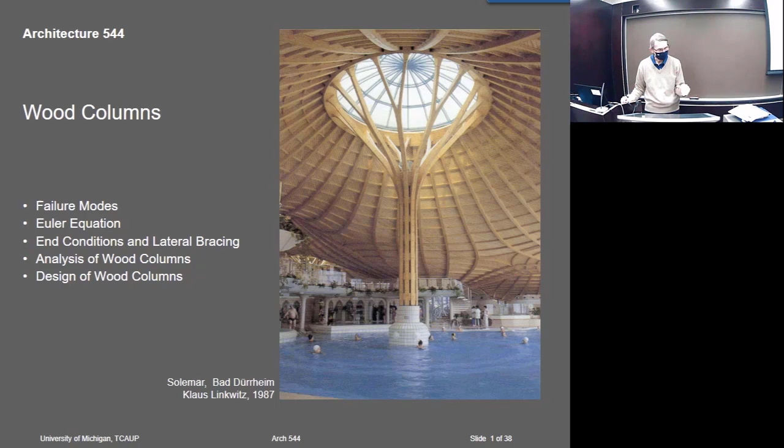So this is a pretty popular resort, but a beautiful structure that Linkwitz did all the engineering for. I think I have a whole separate lecture on that, the erection of it and whatnot, but worth the image, I guess.

Okay, so in terms of designing, or in terms of any structure, we look at three different things, right? Strength, stability, and serviceability. And in terms of strength, when we were looking at...

Oh hey, I could get my little, should I use a pen or a laser pointer? Oh I see, then I can't write on it though.

Okay, in terms of flexure that we looked at earlier, we're talking about MC over I, VQ over IB. Those are the simple strength calculations.

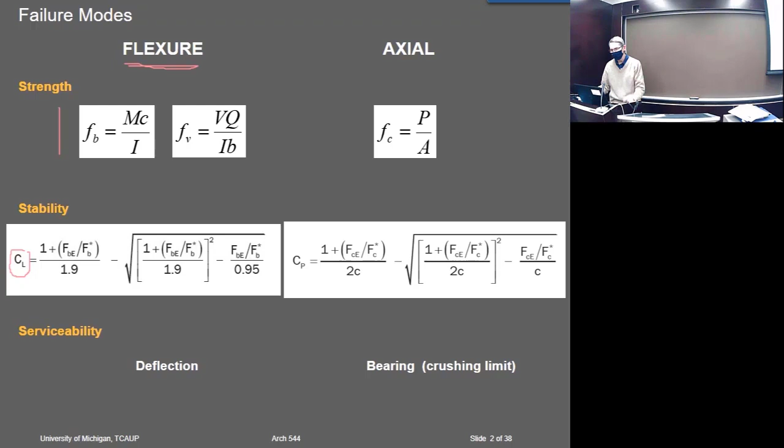Stability was handled by the stability factor, CL. That had to do with lateral torsional buckling in flexure. So that's where all the stability is wrapped up.

Serviceability with beams is mostly deflection, that's what we look at. I guess maybe bearing, although, no not really, well only in terms of how much it deflects I guess, has more to do with the crushing. So that would be more back up with strength.

In axial members, the strength is simply P over A. If you're not considering the buckling aspect of it, then the only criteria is the crushing of the material in axial load. So that axial compression would just simply be P over A.

Again, the stability is handled with this stability factor, or the buckling factor. For columns, it's CP, and you can see it's very similar to the buckling factor used with the beams. There's a slight difference. This element, C, that comes in distinguishes between dimension lumber or glue laminated, or I think there's a third choice. There's different wood types.

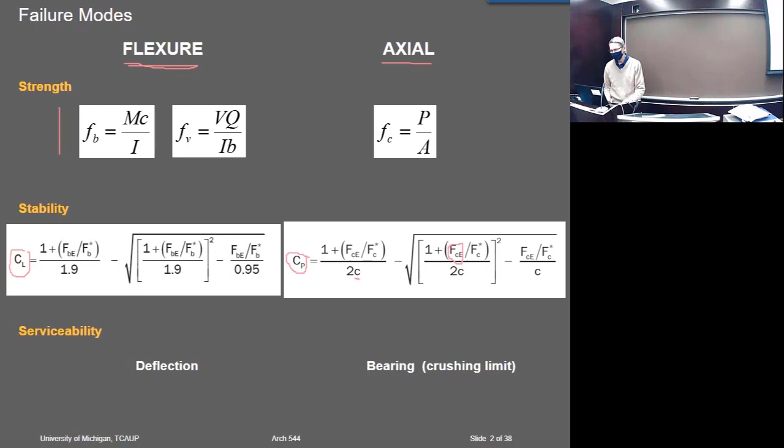Right, and then in stability, in serviceability, I put down their bearing, but only to the extent that the column changes height, that the bearing crushes or something that would become a height issue. There aren't too many serviceability issues I could think of with axial loads, actually.

Okay, so the fellow who first did the calculations—there's a famous story that he did it on the back of an envelope. There were engineers trying to come up with a formula for predicting the buckling of a column, because up to that time they had always just tested individual members until they buckled. There were tables available for individual members, like if you had a 2x4, but you'd have to have a table for every different type of wood, and a table for every different height, and test all of these individually. So they thought certainly there is an equation that would describe this phenomenon without testing each one every time.

So I think they were Dutch, and they sent a letter to Euler, who was at that time, I think, in Berlin. He had been studying elastic deformation, elastic curves, and that's why they wrote him, because that's what it is—an elastic buckling curve. He did the derivation and the calculation, came up with the formula, and sent it back like a day later, literally written on the back of their letter. The only thing he didn't exactly include was, I think, the K factor, and he mentioned it in his letter. He said, well, there's certainly a condition, some factor that's dependent on the fixity or whatever, but you can figure that out from testing.

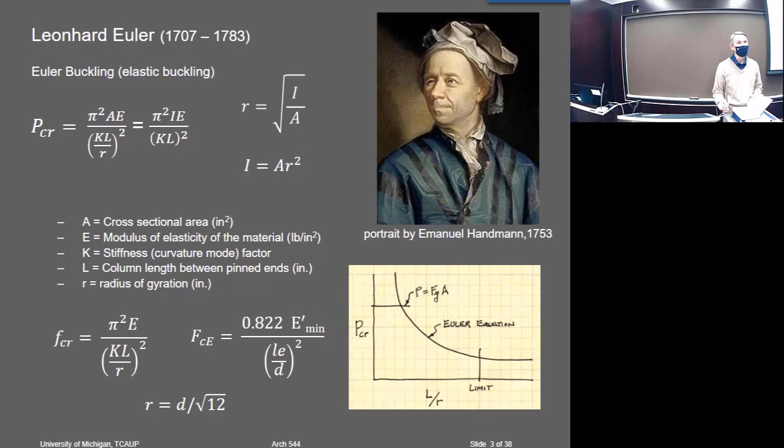Oh my goodness, so he was quite the character. Yeah. All right, well, now I've used up too much time. We'll have to pick up there.

Okay, and now back to columns. We had been talking about Euler and Euler's wonderful equation here. Oops, let's see. Do I not have my pen turned on?

This is the way we usually see Euler's equation, and this is actually the equation we use in wood. It is exactly the same, it looks a little different, but they've converted the R here to D here, and then the square root of 12, well, it gets squared, so it comes up here. This would be pi squared. Oh, I think it's divided by here. It's in the D, it's divided, and it's in the numerator, so I think it ends up being divided by 12.

Does that seem about right? Yeah, it would be something like 9 divided by 12, sounds like about 0.8. But anyway, so the equation is the pure Euler equation, even though it looks a little bit different. But they use D here for the slenderness ratio because it's a lot more convenient with wood, being a rectangular section.

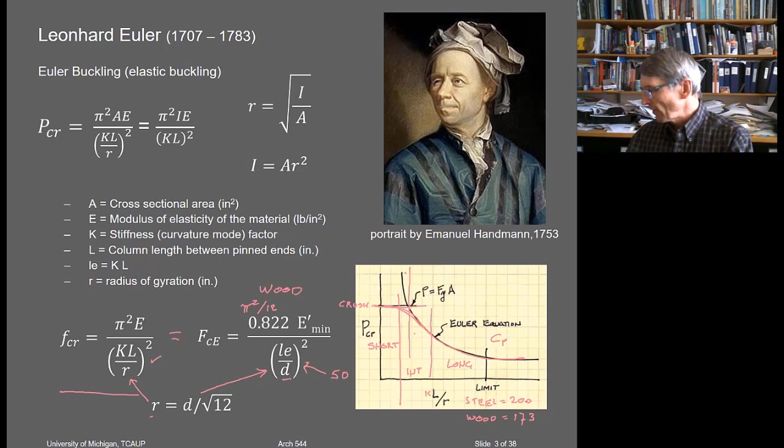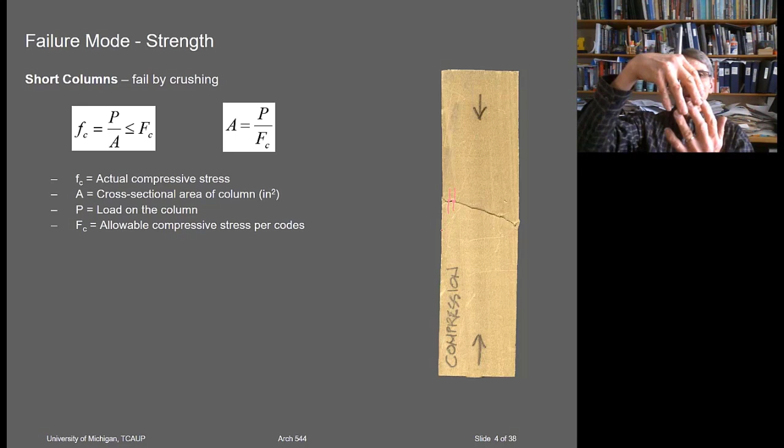If there were no buckling, then the wood would crush, and you can see it actually does. These fibers are kind of buckling, right? You've got fibers that are like little columns themselves, and the fibers are crushing or buckling in the wood, and that produces the crushing.

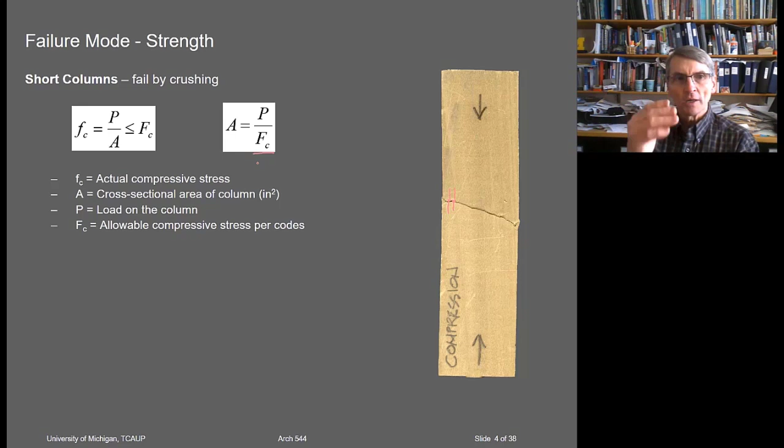This would be at the full allowable stress for compression. That's what you'd expect to see, and the area would be P over the stress, the load over the stress, or the stress is equal to the load over the area. But that would be a short column failure.

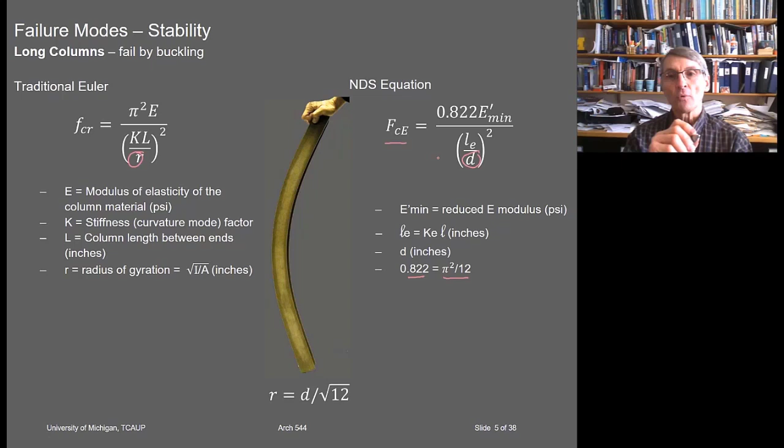Okay, but most columns are in between somewhere. They're not so short that they're going to crush, and they're not so long that it's a pure Euler buckling. They're in between, and that's why we use the CP equation to find exactly where on that curve they occur.

Of course, what really affects the behavior is the slenderness. The more slender it is, the more likely it is to buckle. And the slenderness, in the way we're defining it with the wood, is LE over D.

You can see, because wood is rectangular, you have a strong and weak axis, right? You'll have buckling about the x-axis. If this is the x-axis, then it's buckling about that axis, and that would be the strong axis. It has D greater, and your slenderness then would be less. As D gets smaller, your slenderness goes up.

So when D's 1.5 on a 2x4, that would be buckling about the weak axis - that would be about this axis. It would be buckling this way, and that would be the weak direction. So here you can see this would be the weak direction. That's the way it would normally buckle.

Of course, if you brace that weak direction, then maybe it will buckle in the strong axis. It'll buckle in the direction whichever of these slenderness ratios is greater. So here, for an unbraced 8-foot piece, we've got in the strong axis of a 2x4 a slenderness of 27, and in the weak axis it's 64, which shows you, wow, okay, that's already greater than the limit of 50.

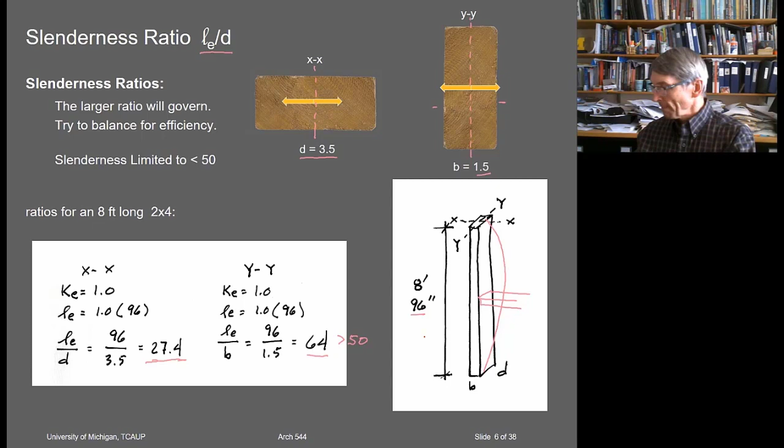Along with the height, the end fixity of the column affects the way it buckles, right? If both ends are pinned, which would be the normal condition, then you'll get the full length of it buckling. If one end were fixed and the other end pinned, then you're going to get only that part of it really representing the curve.

That would be at a ratio of 70% of the original height. That would be 70, and this would be 30 down here, right? And then that becomes the factor, the K factor.

Although that's the recommended value, they assume this isn't fully fixed, that it may twist a little bit and reduce it. If you've worked with steel, in the steel manual they get more precise with this—they look at the stiffness of the beams top and bottom, and they have a nomograph where you can plot across and find a more accurate K factor.

In wood, in truth, that doesn't happen, because the connection between the beams and the columns is really not fixed. It's going to be more of a pinned connection, so at most you might use this graph, but usually you'll be using this one right here. This would be the normal condition.

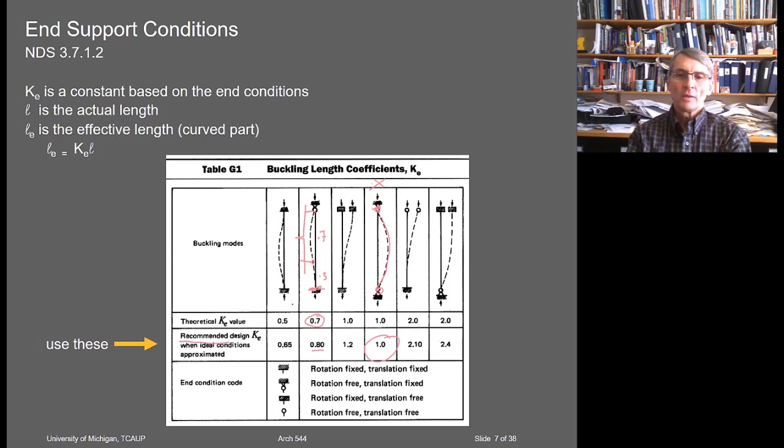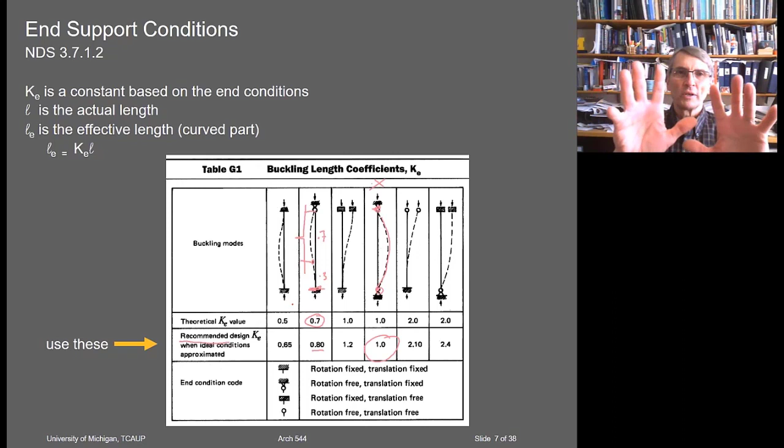If you have one end sunken into a concrete footing, like they typically do with outdoor decks and things, embedding that in concrete—well, maybe that would give you something like that, if the concrete doesn't twist in the dirt. So you could use perhaps 0.8, but normally you don't get fixity with it. Even with a steel bracket around it, the wood can shrink and become loose in that steel pocket. Maybe with steel plates bolted to the wood, but it gets to be a very complicated thing. And even if it's a steel plate that's bolted, the bolt presses against the wood and has some wiggle room, so it's very difficult to really get fixity with wood.

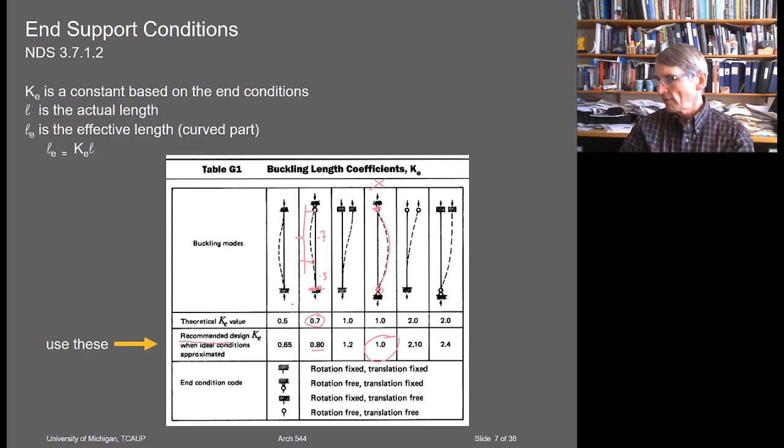This is out of the supplement, happens to be for eastern hemlock balsam fir, and the compression we're talking about is this one right here, parallel to the grain. This is for columns. Compression perpendicular to the grain is actually bearing—it's not on a column, because this is the direction parallel to the grain, which is how a column is normally oriented. This would be perpendicular to the grain.

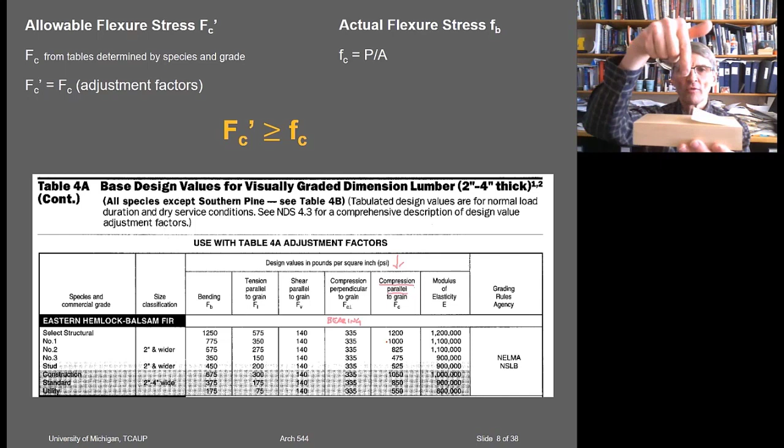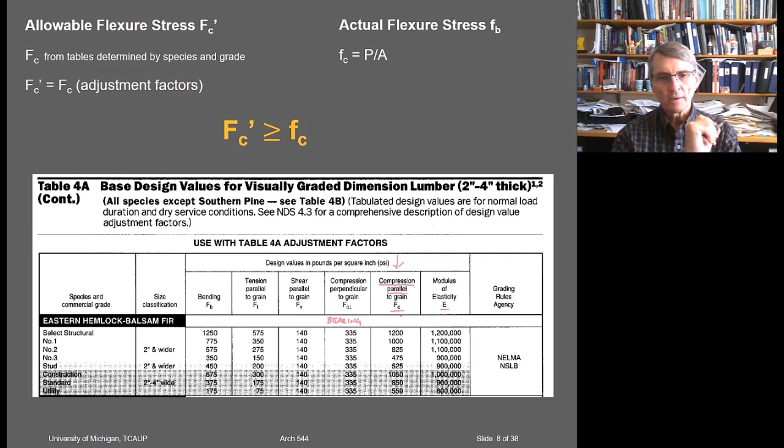The grain's going this way, so if I put a force on this way, it would be perpendicular to the grain. So if I have a sill plate—we'll look at this a bit later—in a stud wall, the stud would bear on the sill plate, and that would be the bearing stress, FC perpendicular. But the one we're interested in is this one right here, FC. You'll also need the E modulus, or E min actually, to calculate the CP factor.

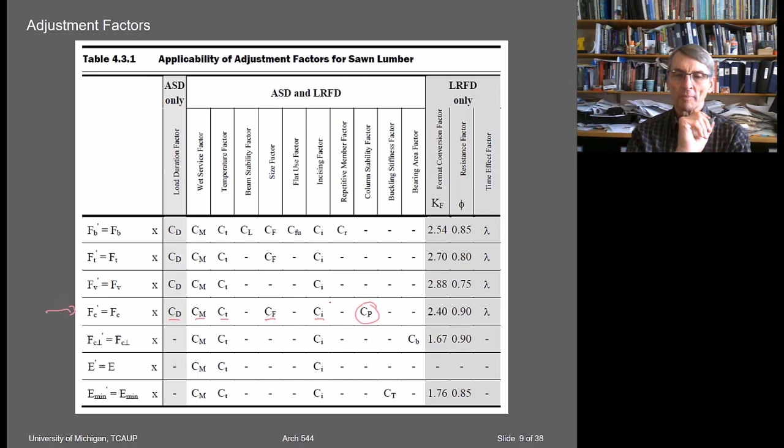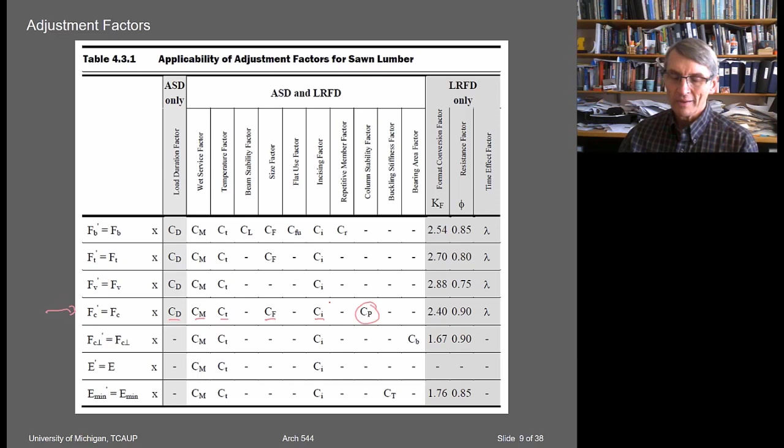You're always going to have to calculate CP unless it's totally braced, embedded in a wall or between two walls. So this just reviews some of these factors: CD, right, we've talked about that—those are all the CD factors and the different load combinations.

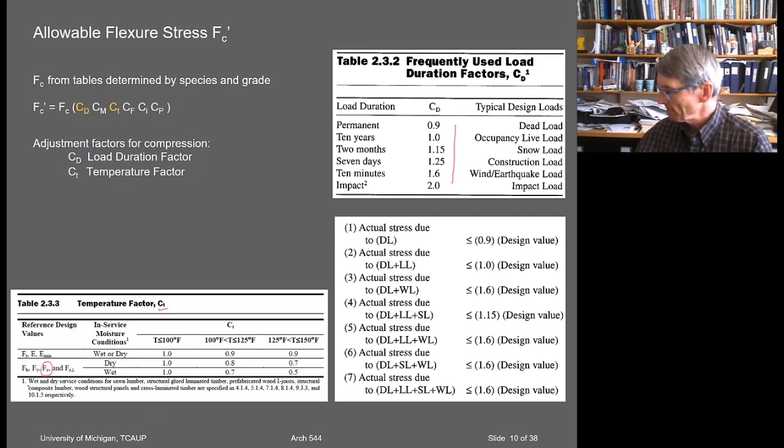Temperature factor—so here we've got the FC down there, depending on whether it's wet or dry, it's the same factor as for bending for temperature. Here for moisture content, CM, we're over at this end, and again you'd need both of these. If moisture is a problem, if it's above 19%, then you'll need the factor for E min to calculate the buckling coefficient, the CP, and then this would be the straight CM factor on the compression.

And there's a little double asterisk here: if it's really low-grade wood, less than 750 psi in compression, then you don't need to worry about the moisture further—apparently 1.0 can be taken.

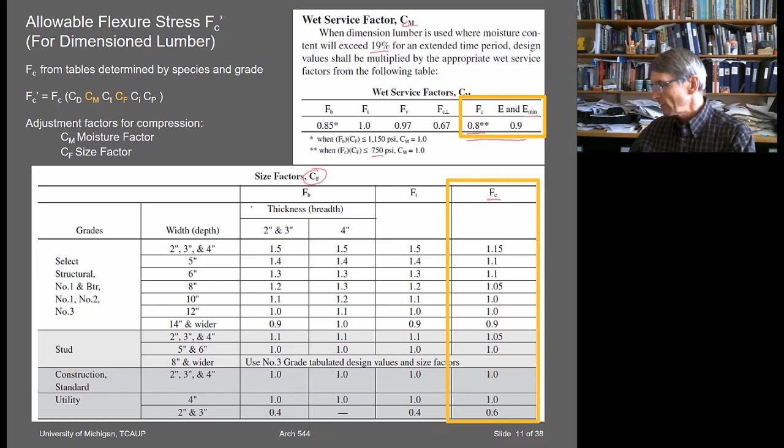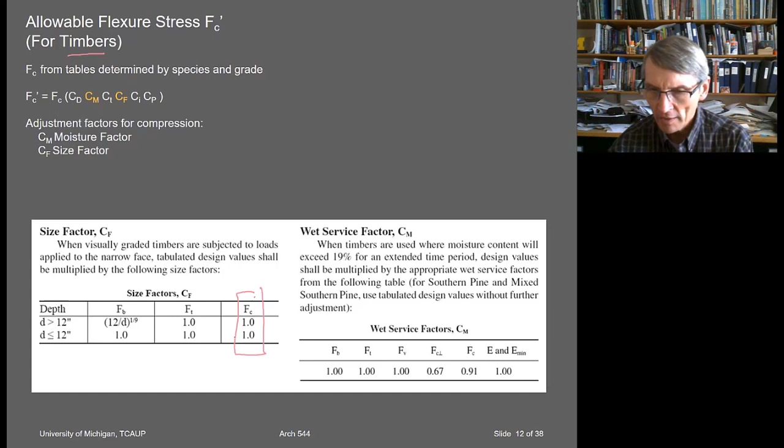And then these are all the factors for CF. Okay, and this is for the timbers—it's a little different for timbers, particularly CF, as I mentioned, is 1.0 for compression for timbers, so you don't need to worry about CF really for timbers. The moisture content is also a little different—those numbers are 1.0 for the E modulus.

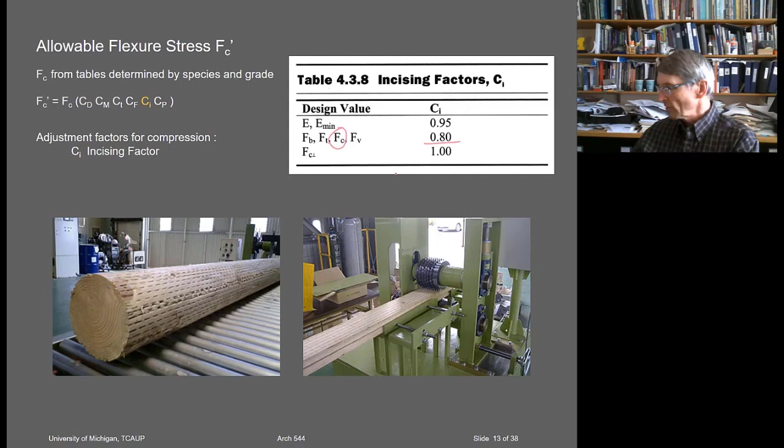And this is the incising factor. Here's where it comes in. If you have incising, that's not uncommon for some columns, big timber columns that would have incising on them. You see it a lot on telephone poles for some reason. I guess they're all chemically treated.

Okay, and now the CP factor, the big one. You can see it's a formula very similar to the CL formula that we used, with a little bit of difference. They introduce another variable C here rather than just using the same value across it all. It varies slightly between sawn lumber, which would be either dimension lumber or timbers, anything sawn, versus round timbers or poles, telephone poles maybe, a little bit higher, or glue laminated timber, which is the highest. So there's a little bit of variation in that factor.

Otherwise, we calculate the Euler buckling, and we look at a ratio between the Euler buckling and the factored compressive stress. This has got all the factors on it except CP. Of course, you're trying to calculate CP, so you have to calculate, or at least find, all the other factors first, and then CP is always the last one you do, since you've got to have the others to do that FC asterisk. There is, again, over here, they mentioned the limit of 50 for the slenderness ratio.

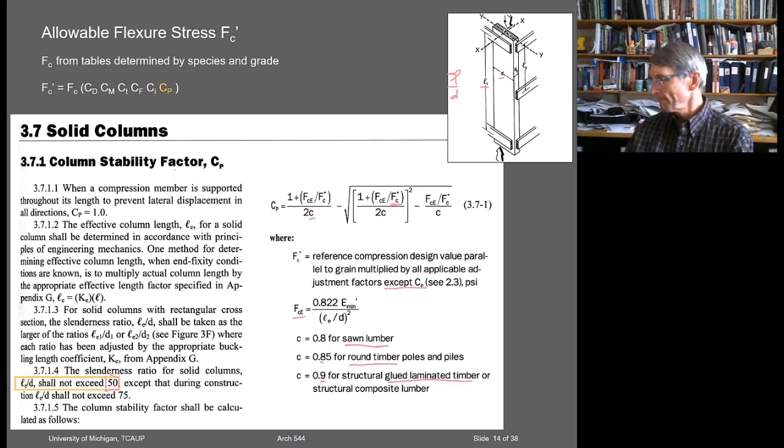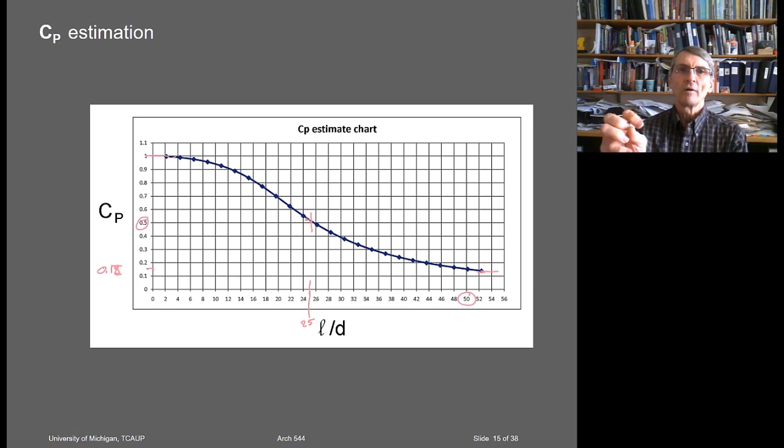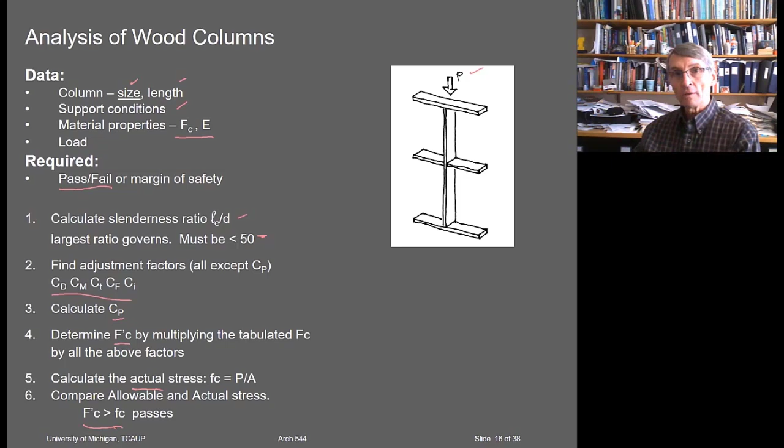This reminds me of the pole barn my son was working on. It's maybe a little taller than that, but this is not a stud wall. This is like the wall in a larger shed-type building, with the roof coming down on it. That load is coming from a snow load.

And it is braced partially. It has some sort of bracing on it, and it's the strong axis height. It's a 4x8, so it looks like that, right?

So the strong axis buckling out of the wall would be in the 8-inch direction, with the full 25-foot height. The weak axis is going like this, and because of the way the bracing's set up, it's not totally even. The longer one is going to be that 10-foot in the middle, a little bit longer.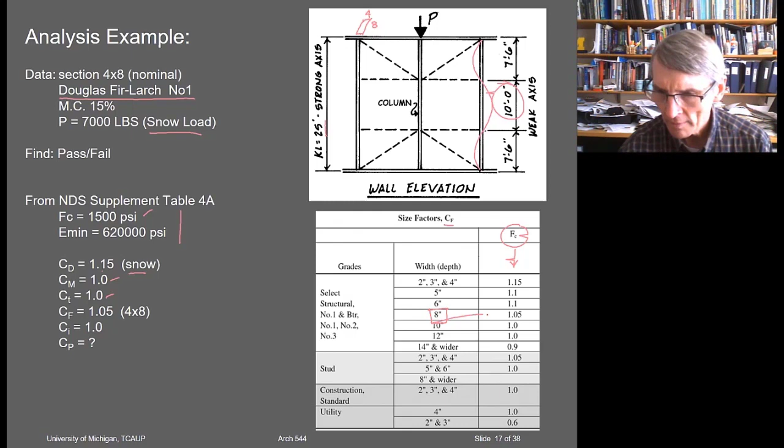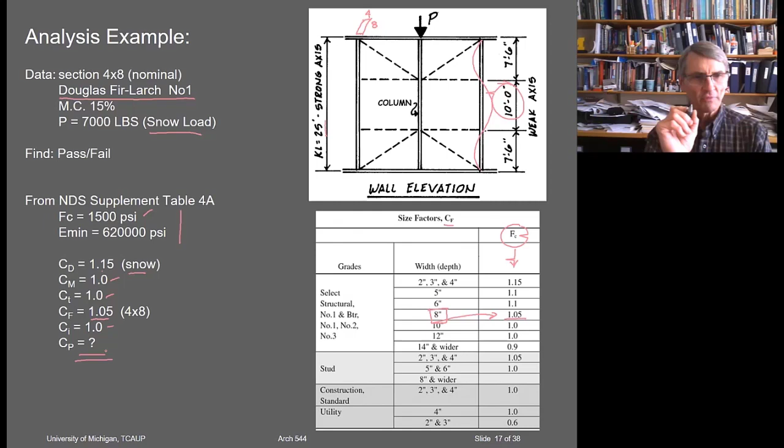And we've got a 4x8, so an 8-inch member. It looks like 1.05. There we go — 1.05. And it doesn't have any incising, so that's not a problem. CP, we've got to calculate CP. So we got enough of everything else. Now we can go ahead and calculate CP.

Here's the lovely equation, and we start by finding which slenderness ratio governs. In the 25-foot direction, that's 300 inches over 7.25, which is the dimension lumber 4x8. Versus 10 feet, 120 inches on the 3.5-inch direction. That gives us 34, but this gives us 41, so 41 is the one that's going to control.

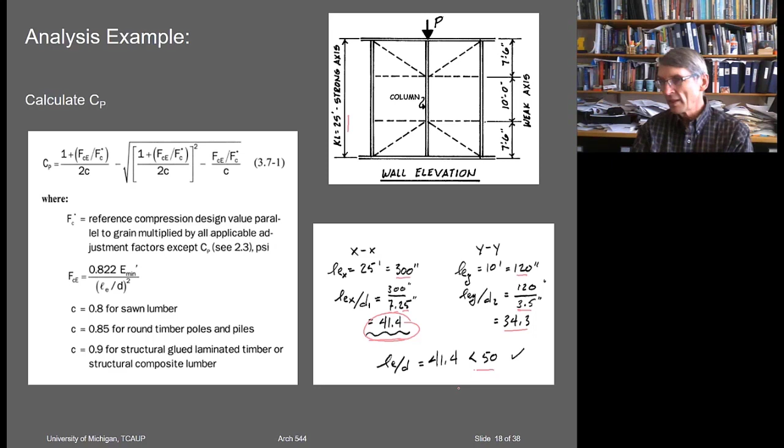So let's go ahead and do the calculations then. The Euler buckling, this is with the slenderness we just calculated, comes out not terribly high, 297. The FC for our lovely Doug Fir is even raised a little with the snow coefficient, so that's way up at 1800. Wow, so a large discrepancy.

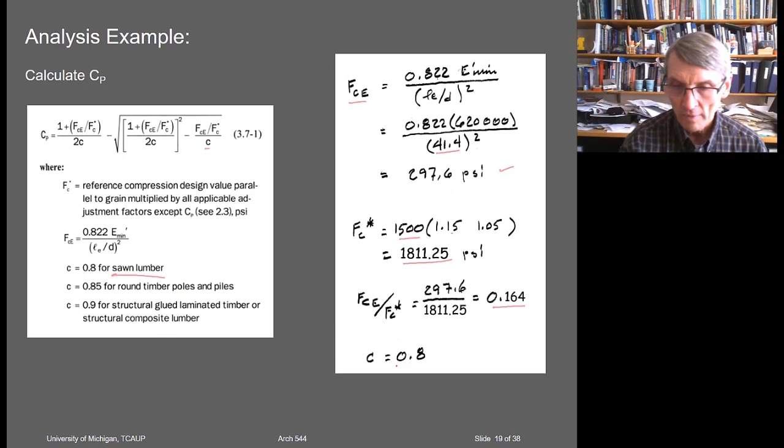This factor then is 0.164, pretty small, and the C that goes in down here is for the sawn lumber, 0.8. So we run all that through, and what do we come up with? Hey, that's about right — 0.1584. There it is.

Okay, so now we can get our allowable stress. We put all the factors in there, the CD, CF, and CP on the end, and it drops it down to 286 from 1800. Wow, drops it down to 286 or 287 almost, and so that's the allowable stress.

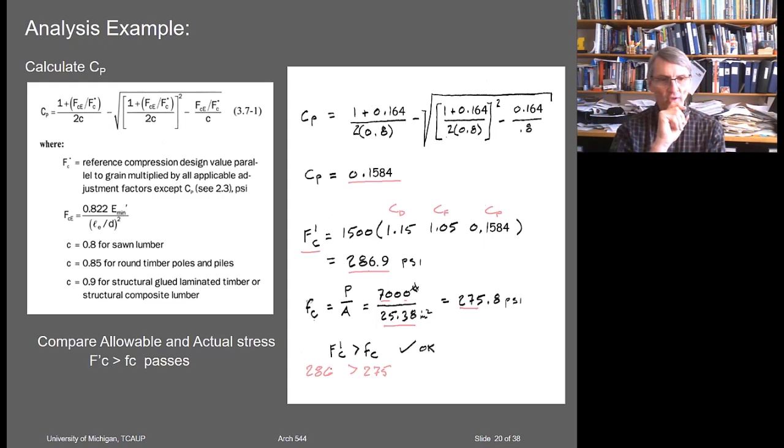Then we can calculate the actual stress. We had a load coming on it of 7,000, that's the point load, and the area of that 4x8 is a little over 25. So the stress comes out to be 275. So it's enough area, and 286 is greater than 275, right? So it works out, that one's safe, passes.

Okay, so now we can look at this capacity example. So again, it is a type of analysis. We're given the size, the length, the support conditions, and the material, but what we don't know is what the load is. So this is what we're looking for, the load up there.

So it starts out exactly the same. We do the slenderness calculation, check that, get all our factors, find CP, find the allowable stress. Then once we have the allowable stress, instead of comparing it to the actual stress, we can't really calculate the actual stress because we don't have the load. We set the actual stress equal to the allowable stress, so we're raising the actual stress to the highest level that's allowed, the full allowable stress. And then we calculate the load based on that.

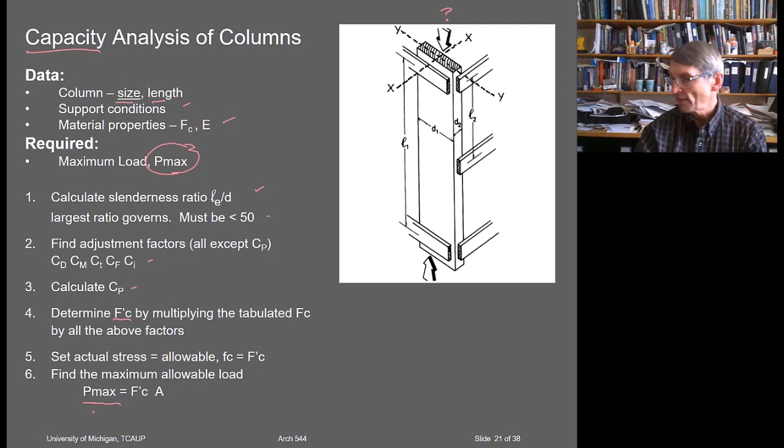So here's another example, a little bit different, slightly larger. Remember, we got a 4x10 now, and Hem-Fir number 2, a little bit lower grade. But this one is subjected to some moisture, 20%, so we're going to have to calculate our moisture factor. It's only 8 feet tall, and it's braced at half height, so these are 4 foot and 4 foot, that's 96 inches.

To get the slenderness ratio, it'll be 10 on the 8 foot direction, 13 on the braced weak axis. So it's a little bit worse on the weak axis even with the bracing, 13.7. But if you're thinking of that curve, if this is my 50 and this is 25, 13 is about half of 25, isn't it? It's about in there, so it should be pretty high, maybe on the higher side, 0.7, 0.8 maybe.

That would be a guess as to what the CP is going to come out. So we could guess maybe 0.75, between 0.7 and 0.8. Something like that would be a guess. Okay, the others we can calculate. This is coming from a wind load, we said.

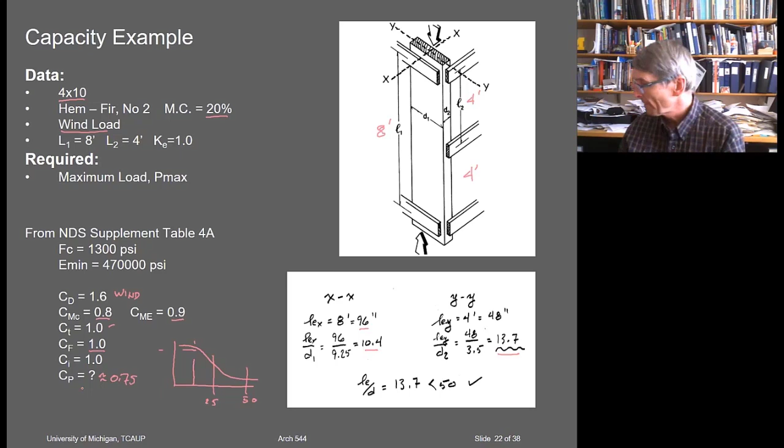So here's the moisture factor, there's the 0.8 and the 0.9, we'll need both of those. And it is over 750 psi, we have 1300 I think. And times CF, what is CF? We've got a 4 by 10, so that looks like we've got 1.0. So there's the 1.0 for CF, so that does check then, that's not an issue. So we're going to use those two, those are the factors that we need.

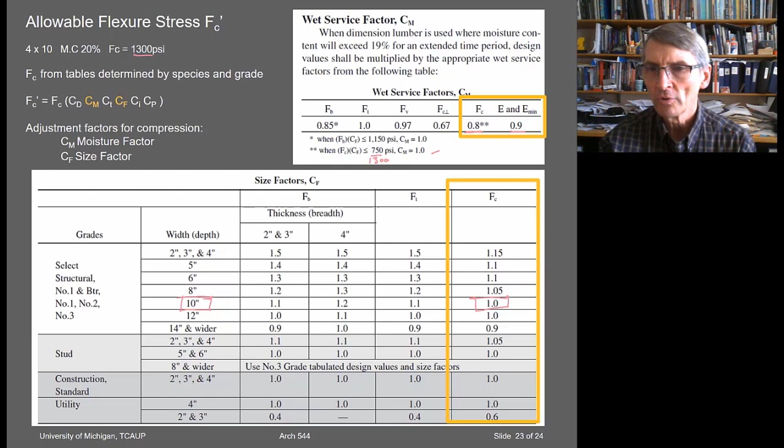Now we can go ahead and calculate CP. Get the slenderness, this is the slenderness that we're using, and we get the Euler stress, quite a bit higher. Wow, remember the other one with the much larger slenderness ratio was very low, it was only a couple hundred or something, wasn't it? Now this one's up at 1800, higher than the actual tabulated stress. So we put the factors on that, and we get the ratio.

It's now above 1.1, that goes in there and there and there. And we are using, this is still dimension lumber, so my c is 0.8. And we do that calculation, and it comes out to be 0.72. Okay, so almost 0.73. Well, we were in the ballpark, I guess we were guessing 0.75. That looks like we were pretty close.

Okay, so now we have to put that value in along with the CD, and this was CM, and that's now CP. So that gives us a compressive stress of 1208, and now we take that as the maximum allowable, multiply it by the area, and that'll give us the maximum allowable capacity load. So almost 40 kips, 39.1 kips would be the capacity. Okay, so that's got that one.

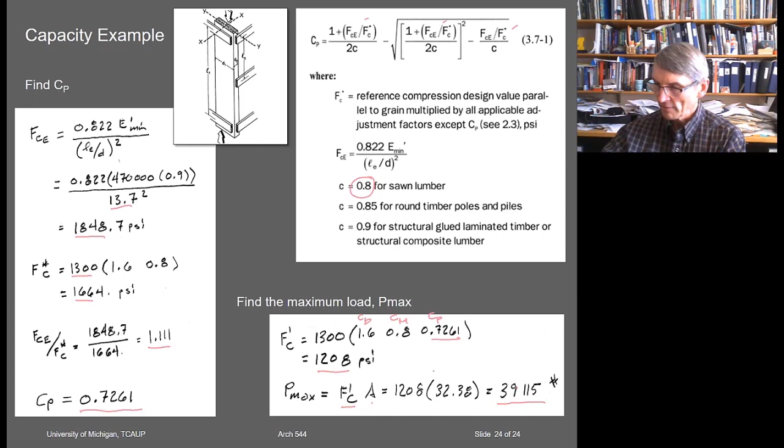Now the very last one we'll do here is a timber column, and we'll do this as a design problem. This design procedure is the same whether it's timbers or dimension lumber, doesn't really make any difference. I did this one with timbers because we haven't done one with timber yet, so this one's with a timber size. But like a lot of design problems, you don't have enough data at the beginning to totally determine the size.

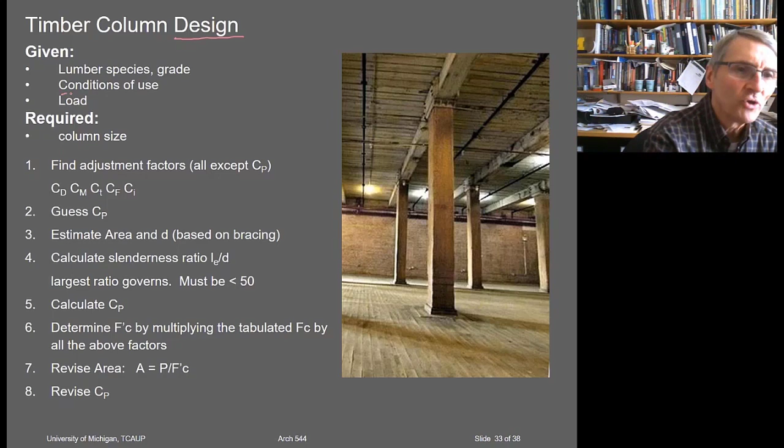Meaning the conditions of use, particularly CP and CF, depend on the size, right? And what are we trying to find? The size. So we can't get the values to determine the size until we have the size. So this is the dilemma that you're always in with design, or a lot of times with the design problems.

And it leads to an iteration. You have to estimate something, estimate the area, estimate the size of the column, calculate it all the way through, revise it, recalculate this, and then start over. Come back up here, and maybe it was where we guessed CP. Now you've got a CP. So there is an iteration here that you go through.

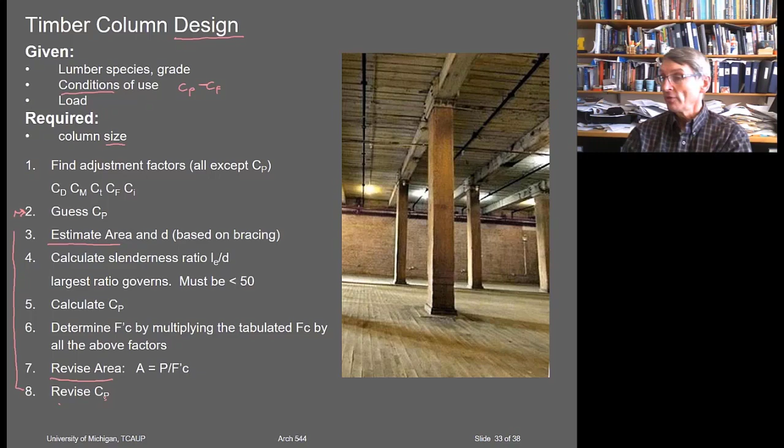You make a guess. You could do it, and you can make guesses at different things, I guess. You could just guess the size of the column and then analyze it and see whether you've got to go bigger or smaller. In this case, I guess I made a guess at CP, but whatever you guess, you could guess the size is probably easier to guess. Particularly if you have tables. You'll see there's some tables that make it a little bit easier to guess the size.

Okay, so here's an example. White oak number 1. Okay, got some hardwood here. It's going to be used dry, right? So this is going to be 1.0. Normal temperature, so that'll be 1.0. It's not incised, so incising is 1. So we don't know CF, and we don't, let's see, we should know that. This is live load, so that's also 1.

So everything's 1 there. We could maybe guess C. Oh, we do know CF. Timber, all the timbers for CF are 1.0, I believe. So that's also 1.0. So the only one we don't know is CP. And in this one, I made a guess at CP. Like I said, you could guess the area maybe as a starting point, but I just took a middle value, right in the middle, 0.5, and said I'd try that.

So we're going to have to get the stress. This is white oak number 1, and it is a post and timber here. Make sure you get the right column, number 1, and this looks like the number we want, 825, and we also want E min, I believe, for buckling, for the Euler equation, 370. So those are those 2 numbers I want there.

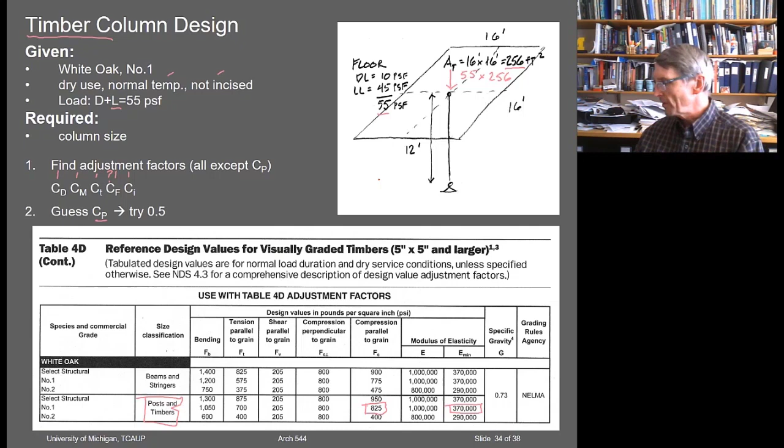Then I've got to calculate the load that's coming on here. I've got 55, looks like 55 PSF, and it's on 256. So I'm going to say 55 times 256, and that's going to give me P. I don't see my calculator. Somehow I don't have my calculator here, but that will be our load. Here it is. This must be it. 14,080 pounds. Okay, a little hard to read. Sorry. 14,080. That's that number down there. Okay, so

I'm guessing I'm going to calculate the area here so that I can choose a member, and I'll take that load. The load divided by the stress is going to give me the area, and I'm guessing the CP value, and this was what I had out of the table. So I come out with a required area of 34 square inches. So taking the square root of 34, just assuming it's going to be a square column, looks like about 5.8 inches.

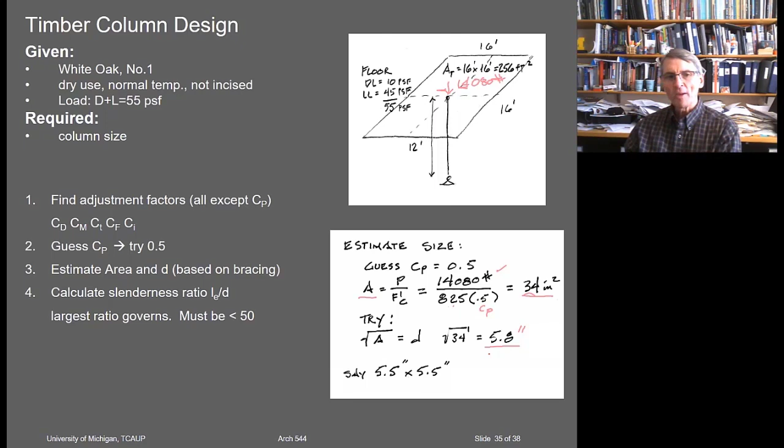So as a guess, that was close maybe to 5.5. It's kind of going down a little bit. You know, maybe I was low on my 0.5 guess. I don't know. So 5.5. So I could say a 6 by 6. This is what I'm guessing. A 6 by 6 column. So we will try a 6 by 6.

So now I've got the size. I can actually just go through the analysis procedure, right? I've got the size. I can calculate a slenderness ratio based on the 12-foot height. I can then kind of guess, 26. Yeah, well, 0.5 wasn't a bad guess then. Maybe if it's coming out at 26. We calculate an Euler stress. We get the FC asterisk. Those were all 1, right? 1.0.

That's supposed to be 1. And that gives us the stress doesn't change much there. But then when I calculate CP, this is about in the middle too, and it comes out a little bit below 0.5 actually, but okay, pretty close to 0.5.

It's probably correct. But that means my guess at 0.5 was optimistic. So it's going to require more area. Since the CP is lower, the stress is going to be lower. I'll have to have more area to carry the load. And I already I rounded up, didn't I? I mean, I went down.

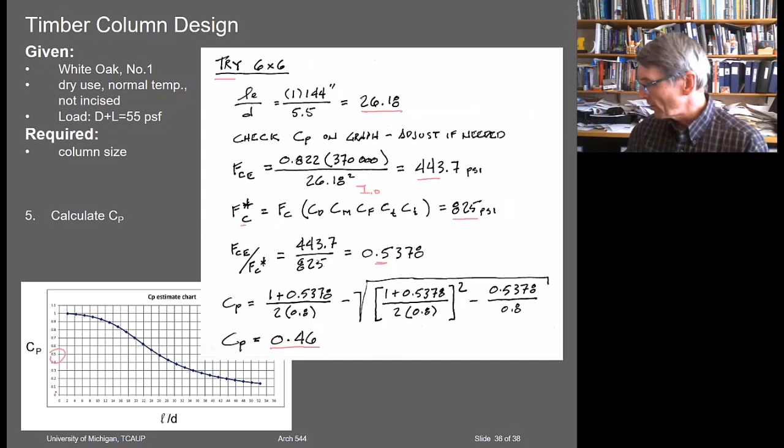Okay, so I've got to revise my FC. Now I've got a more accurate CP. I put that in my F prime C and get a revised A, and I see, oh yeah, the A for the 6x6 is only 30. I need 37, so the 6x6 failed. So looking at

Looking at some properties here, what do I need? I need 37, so that one failed. Any of these would pass, right? So I don't have to really go up to an 8x8. I could do a 6x8 maybe. At any rate, that's one I chose. That's one I'm going to try, is the 6x8.

And that'll have 41.25. It should work. So we calculate the slenderness ratio on that. It still has the same, buckling's going to be about the same axis, right? It's still the 6-inch weak axis.

So the slenderness ratio actually doesn't change. The CP then doesn't change since the slenderness ratio didn't change. And if the CP didn't change, then my F prime C doesn't change, and that means this is still correct. Nothing changed, so that one should indeed pass. Right, that one passes, the 6x8. So that's all there is to that.

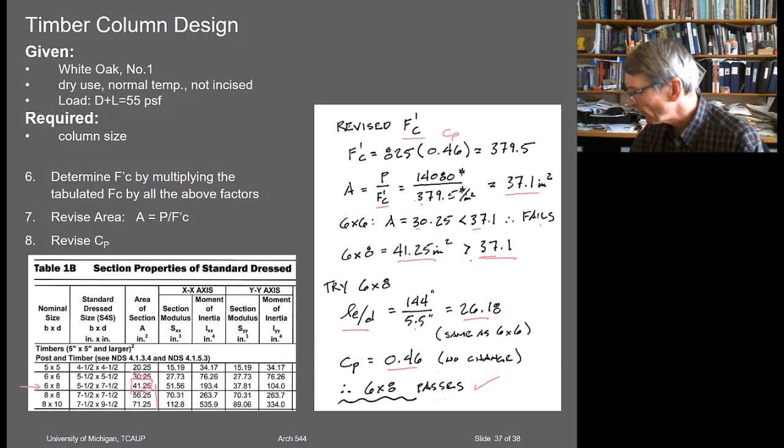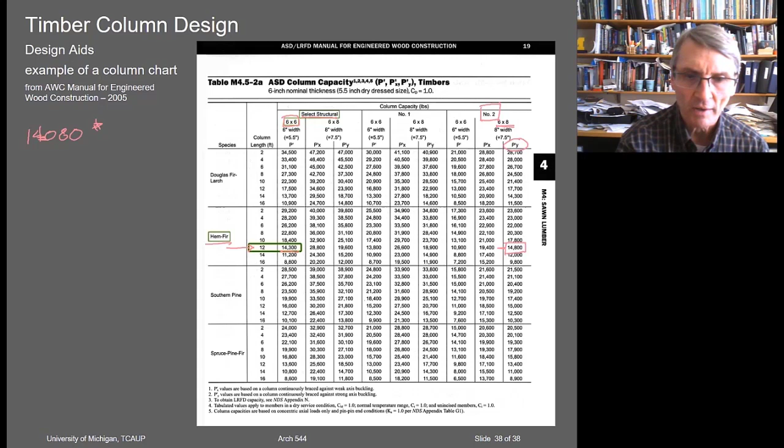6x6 would have worked at select structural. Here I get 14,300, which would be stronger than the needed 14,000 is all I needed. Instead, this has got 14,300. So

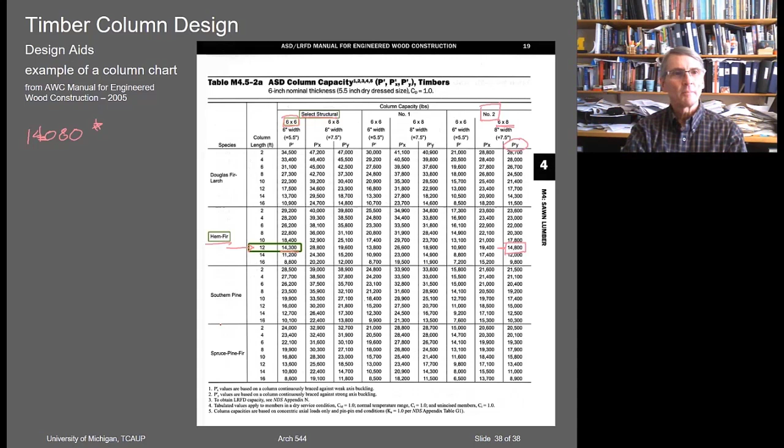Anyway, these tables are available. You can, if you can find them. I think this is, I'll look and make sure, but I believe it's posted on the Canvas site. This should be up there. All right, so that gives you kind of an overview with the columns. You can see from stud wall design or analysis, or even this example with column design, you got a pretty good range of things you can do with the columns.